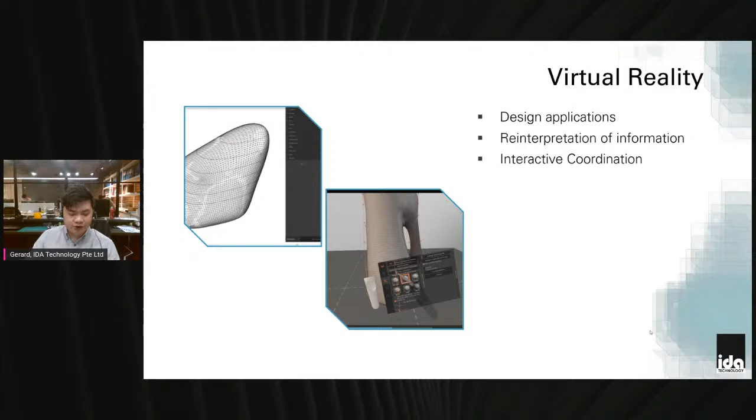So it allows us to reinterpret a lot of information that exists in the database. For example, things that would not normally be accessible to us, we can use virtual reality and the headsets and the goggles to try and reinterpret that data. But what is really interesting and immediately applicable is that virtual reality allows us to do this kind of interactive coordination, where we can interface with other stakeholders in the project and do very meaningful coordination within these construction projects. So I'll tell you more about how we actually apply it and use it for that purpose.

So, about VR itself. VR really is just sensory immersion. So why we are interested in it now is because it has reached a point where it can create a convincing immersive environment. It's no longer like these older technologies which have been around forever. It's not a new thing to try and achieve. People have been trying to create virtual environments for a long time. But the current state of the technology is where it really can put you into another place.

So more than just being able to look through the lens, you are more or less physically there. You can walk around. You can have agency within the virtual environment as well. So you can interact with things and get some feedback from that. And you can also, more importantly, interact with other people as well. So I think that is why at this point in time of technological development, we are very interested in VR.

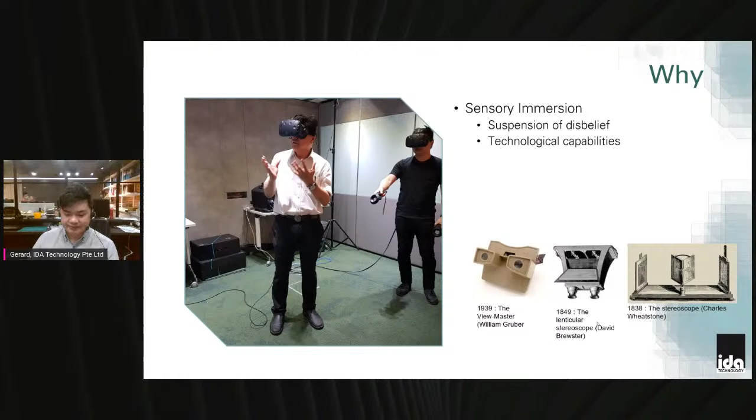And its other technologies. So, first and foremost, VR is a communication tool. So the easiest goal to achieve with this is communication. This helps us, as architects, externalize our concepts. It helps us to communicate our concepts to other stakeholders, whether it's other consultants, collaborators on the projects, engineers, contractors, or whether it's to the client, to tell them this is actually what we are designing.

So traditionally, we've always presented our designs as very abstract forms. So we have things like our plans, sections, elevations, which as industry professionals, yes, we've been trained to really understand. But for the layman, it is not so easy to understand. It's locked behind this abstract layer of drawings where this line means something, this annotation indicates something in the actual building.

So we try and move a bit closer where we have 3D renderings, which try and convey the feeling of the space. Okay, this is what finishes will be, this is what the end result will look like. But this also kind of falls short where we are really trying to explain the experience of the space. What is it like to be here? What is this skylight atrium going to look like? If we shift things around, what would the end result be like?

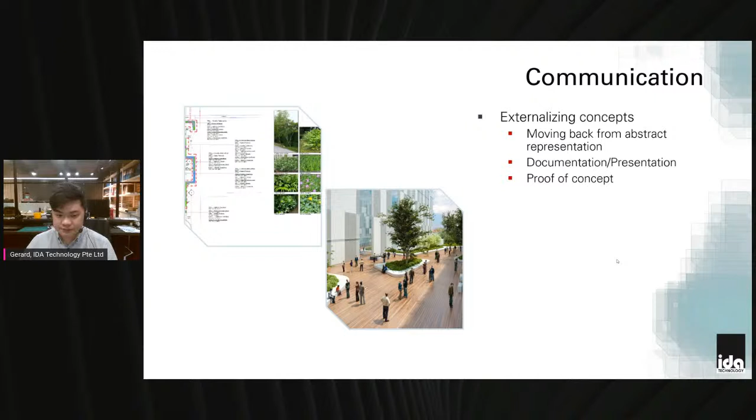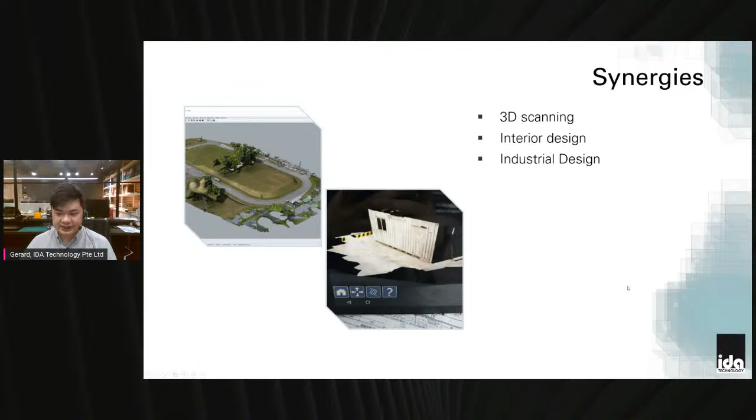So that is just a bit about why we are using VR and what it is. More importantly is, how do we actually implement it? How do we take all this and actually input it into an actual workflow?

The first thing is, we know we need to have an interface for it, a space that we can use it for. Virtual reality doesn't just work if you get the headset and a PC that can run it, with someone in the corner using all this, because it doesn't really have an impact on the project. So what we've done, in addition to developing the software, was also develop the hardware, the space, the interface that would be required for it to work.

So our result is this mixed reality studio. You can see that this is the actual space that we use. It's really a multi-use kind of space, where we use this not just for VR, but also a lot of the project coordination.

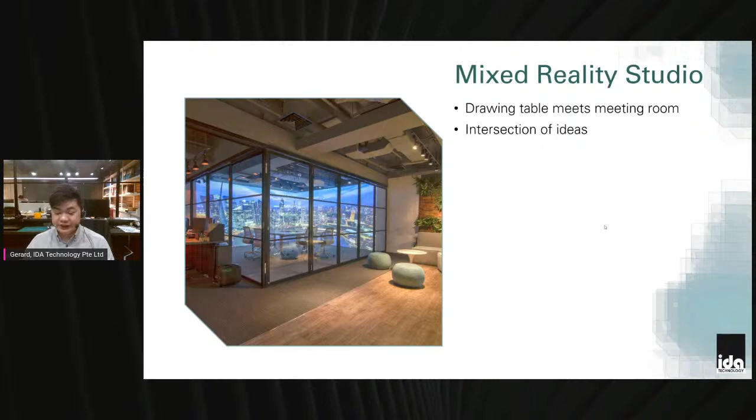Before that, complementary to the space, we look at the process that it's going to be implemented into. So we very strategically implement VR into a specific process called VDC, virtual design and construction. Basically, this is the whole idea of building twice, starting the building in the digital realm first.

So we make sure that we have coordinated everything digitally, the drawings are all in sync, and there are no errors, before going to actual physical construction, where we can avoid things like variation orders and corrective works, which are a waste of time and resource on site.

So this VDC process is great. You can see roughly what it is. We start from a design stage and it goes all the way to execution, so physical construction.

But the problem with this VDC process is that it's very intensive, a very front-loaded process. Usually this entails a period of very intensive coordination between the consultants and contractors. Typically there will be a big room approach, contractor led, where the contractor gets all the consultants - your architects, engineers, QS, and all that - into one room for a full day meeting, and then you go through every individual item in a not particularly efficient process.

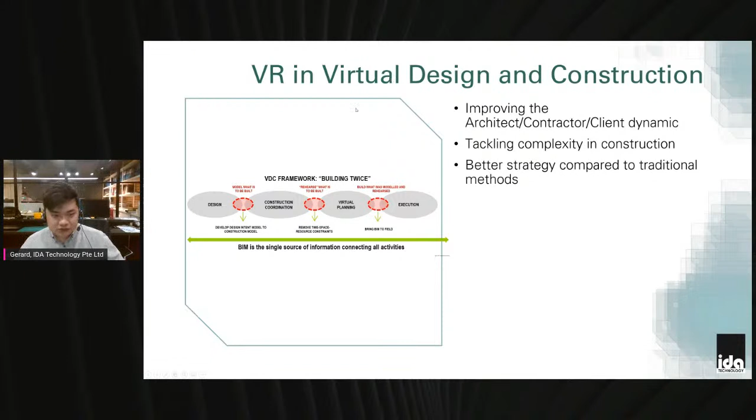There are actually many VR offerings out there. If you look around, there are many off-the-shelf solutions that can be used. But why we went to develop our own solution is that we found all these solutions out there seem to be developed more from a software developer kind of perspective, which didn't really make it suitable for actual implementation in real construction projects. Some of these features are not unique, but we found that no package out there really had everything and could be used in a meaningful way in projects.

So multiple users is very key, because VR really isolates someone into a virtual environment. If you can see all that information there, but no one else can see what you're looking at, then it's not very effective when we're talking about communication and coordinating.

So being able to teleport, a form of locomotion to move around, is important because the virtual environment - almost any project you build will be bigger, unless you're doing just a single room renovation. It's going to be quite a large scale, so you need a way to actually navigate that. So we have teleportation.

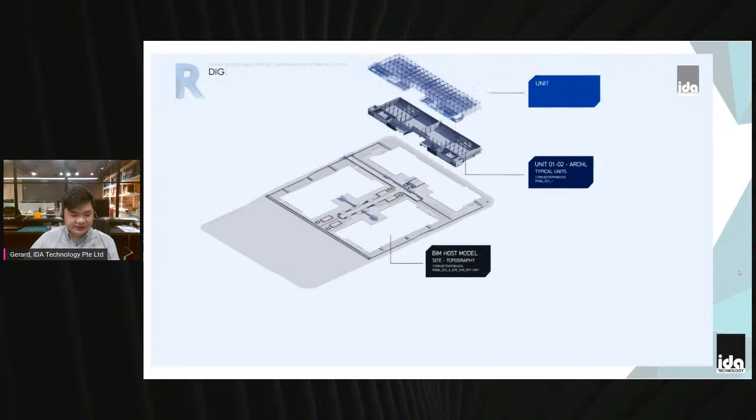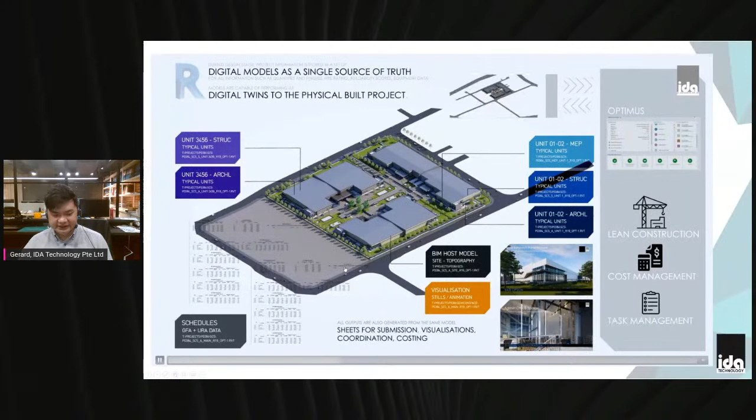So here it's the BIM model, this is the base of all the data. All the information actually comes from this model, we don't have separate sheets of information and stuff like that. This is just a bit about computational tools, how we can use them to help us design.

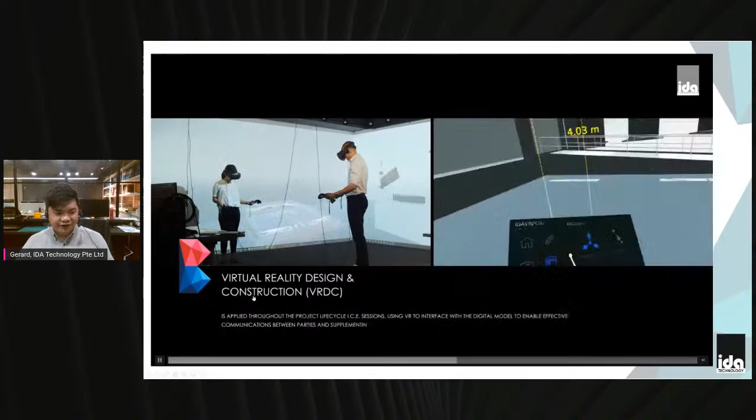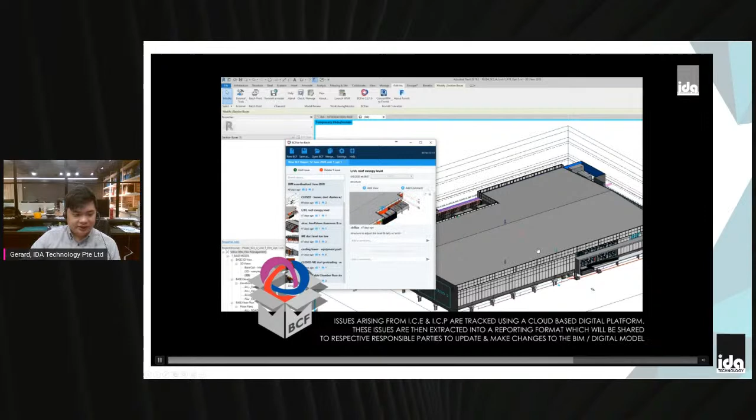So here you can see people in the physical space, how they are coordinating, and this is actually what they are looking at. You're able to see and actually interact with other people in the virtual space as well. Once that is done, we come back into the actual documentation space, and we're able to find the issues that were discussed. We can document that, and then the next time we go into VR, we can check it.

So overall, that is a quick overview into what it looks like. That is part of integrated digital delivery. So yeah, I think overall that is how we apply VR into architectural design and the construction process.

Yep. Okay, thanks Lillian. Hi, thank you so much Gerard, that was an informational and wonderful sharing today. Gerard, are you there? Yep, yeah. Hi, sorry, let's move on into our Q&A session. I have a couple of questions here that I've collected from some of the participants. Perhaps you can share more with us.

The first question goes something like this: with the use of VR, is there any prerequisite knowledge to design the VR experience for a designer or architect to best present their projects? I think we're talking a little bit about content here. Okay, so initially, in the early stages, yes, you have to have knowledge about the game environments, how do you bring it into VR. That is one of the reasons we went into developing the software also.